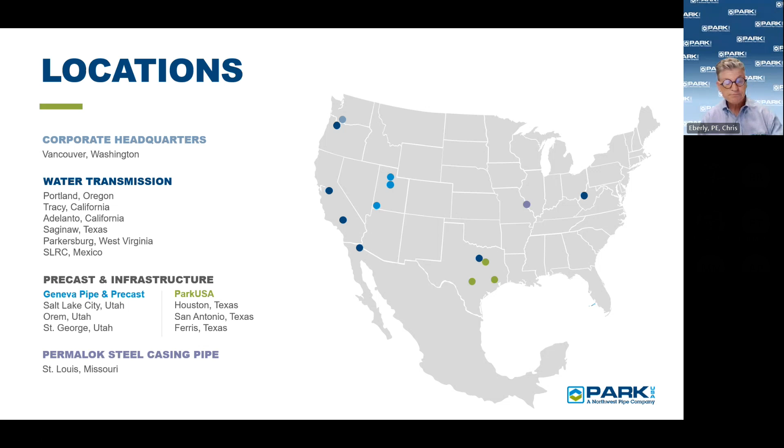We'll dive into the specifics and key components of the lift stations, including the different types of pumps, valves, and control systems. We'll go over a sanitary design for a housing community, but we'll also touch on a detention pond pump design as well. We'll present the overview in a case study format showcasing both wastewater and stormwater.

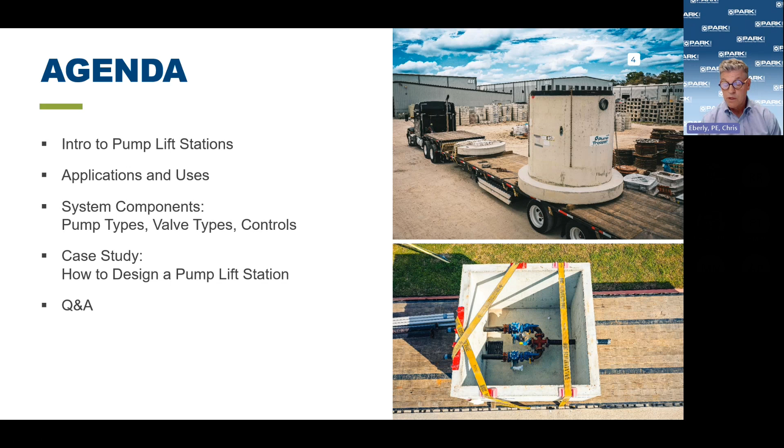Finally, we'll open the floor to your questions, providing an opportunity to address specific concerns or curiosities you may have. We're confident that by the end of this presentation, you'll have a general understanding of a pump lift station and the fundamental concepts and practical designs. So let's get started, and we are going to watch a Pump Trooper video.

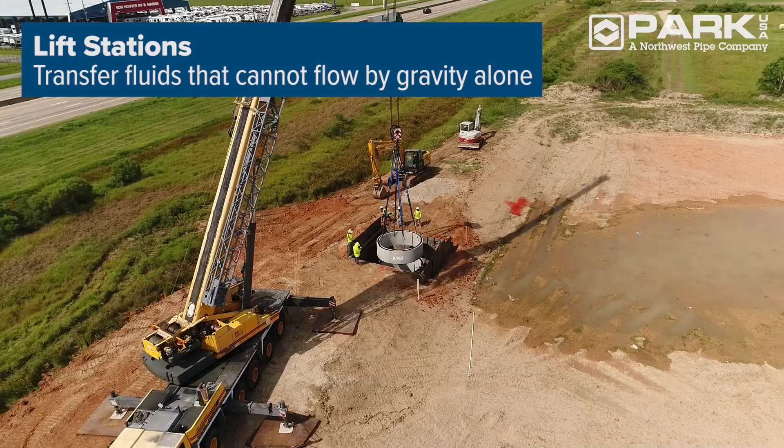Water always finds its way to the lowest point in an area. This pull of gravity can easily lead to flooding, which can create health and safety hazards as well as property damage. Lift stations make it possible for commercial, residential, and community developments to defy gravity, collecting stormwater and wastewater in low-lying areas and conveying it to the municipal collection system at higher elevations. The Pump Trooper by ParkUSA, a Northwest Pipe Company, is a submersible pump lift station that offers a reliable and cost-effective solution for fluid conveyance and flooding control.

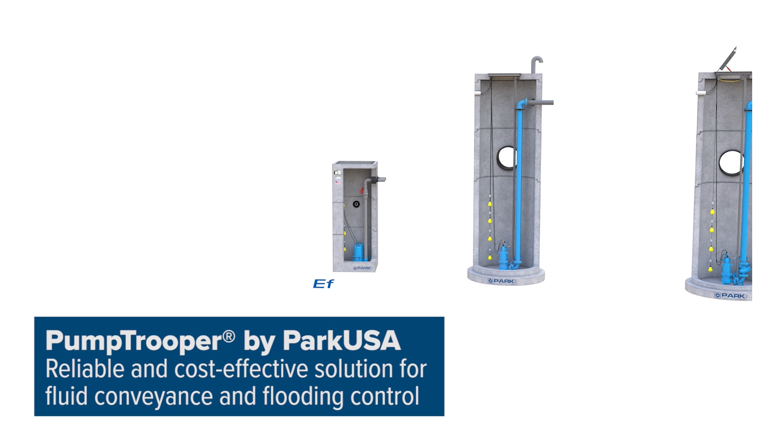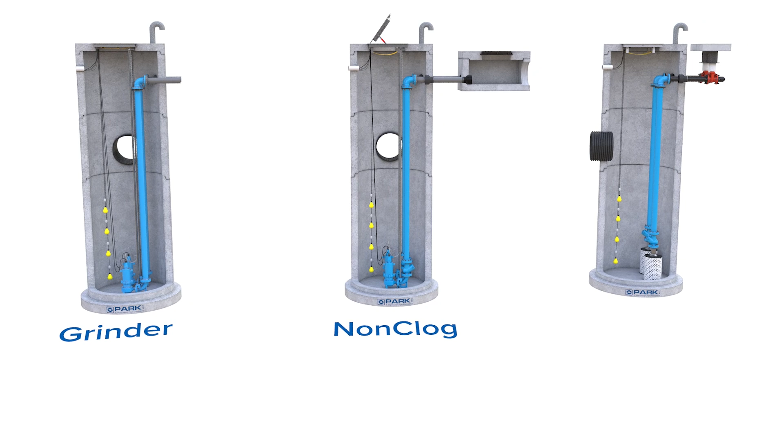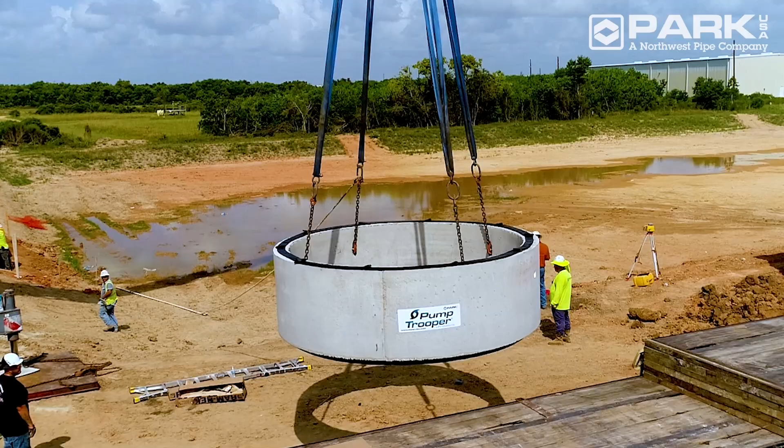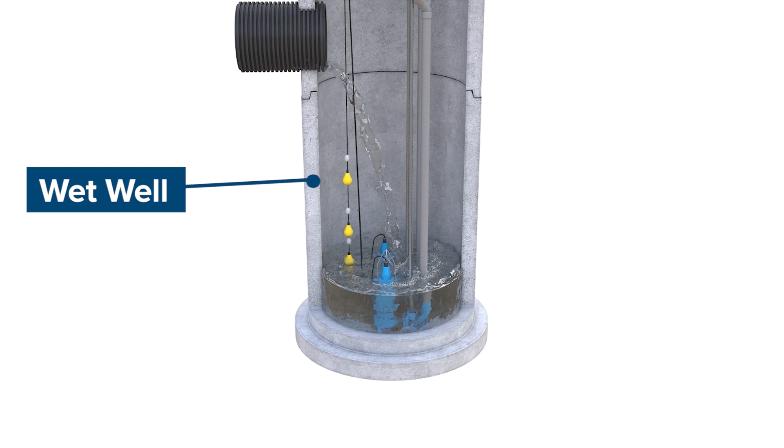With a variety of custom configurations available, we design our lift stations to the exact specifications and capacity requirements of your project. The most commonly used design is the duplex system, consisting of 2 pumps alternating in operation. Multiple pump installations like this provide continued service in the case of pump failure or maintenance and extra capacity in times of extraordinary loading. The Pump Trooper lift station works by collecting sanitary wastewater or stormwater into a wet well through an inlet pipe. As the well fills, an electric liquid level control system monitors the water level. When the water reaches a predetermined level, the pump engages, transferring the water up and out of the wet well basin into the sanitary or stormwater system.

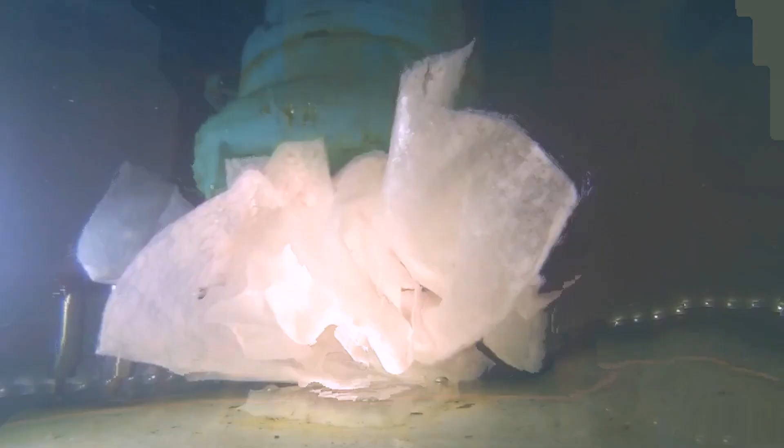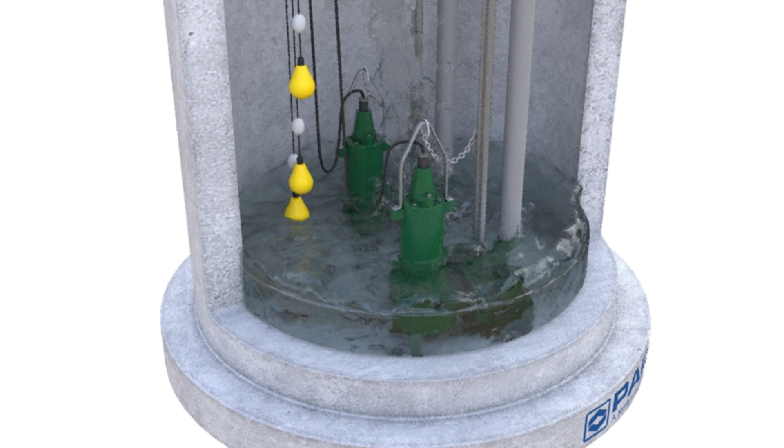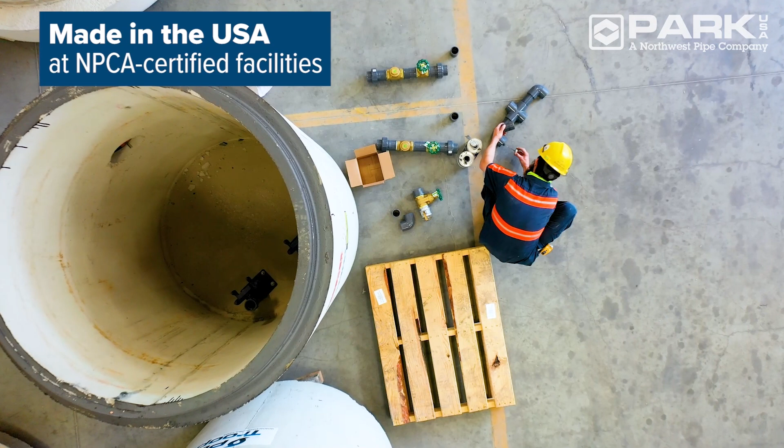For high pressure or higher head applications, a grinder pump is recommended. The powerful grinder pump features sharp cutters that shred solids and move them under high pressure through smaller diameter pipe. The Pump Trooper is powered by a close-coupled electric motor, which operates quietly and is cooled by the moving liquid for a maximized service life. Made in the USA, our lift stations are pre-assembled in a controlled manufacturing environment, ensuring the highest quality product is delivered to your job site, ready for connection. Our team works directly with the field contractor to ensure proper placement and installation.

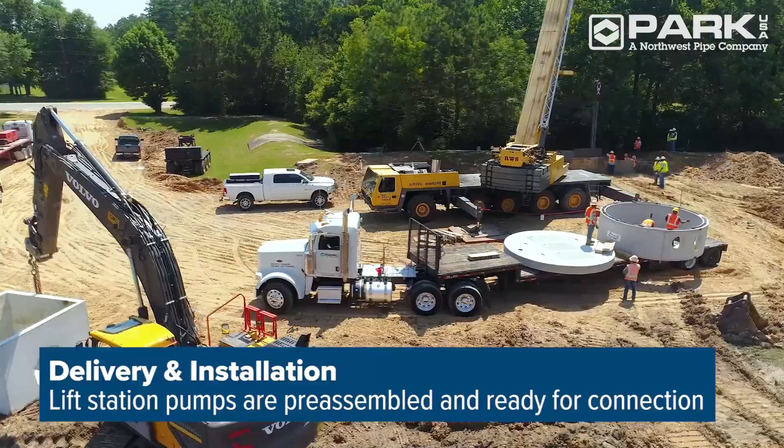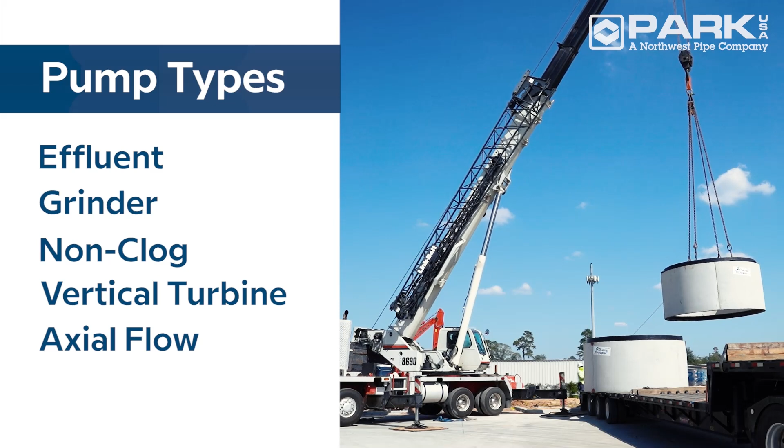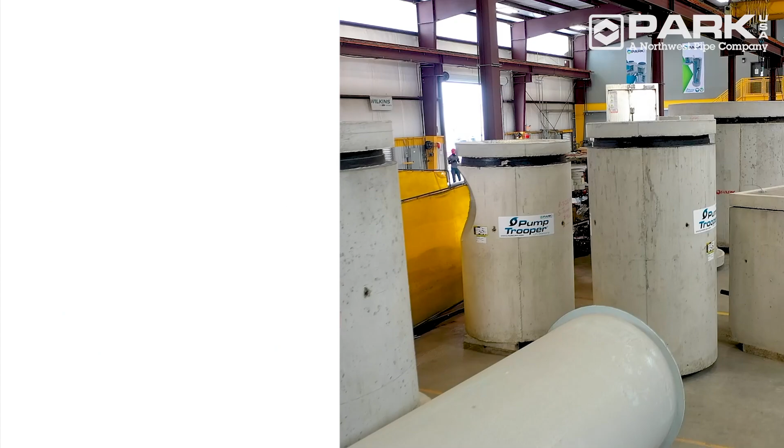Designed for the unique demands of commercial, industrial, medical, and residential environments, the Pump Trooper meets all building codes and comes with a variety of application-specific pump styles. The valve assembly can be housed in the wet well basin for smaller stations or in a pre-assembled valve vault for larger stations. Pump Troopers are available in precast concrete or fiberglass construction in a variety of sizes and with a selection of interior liners and an optional remote maintenance alarm.

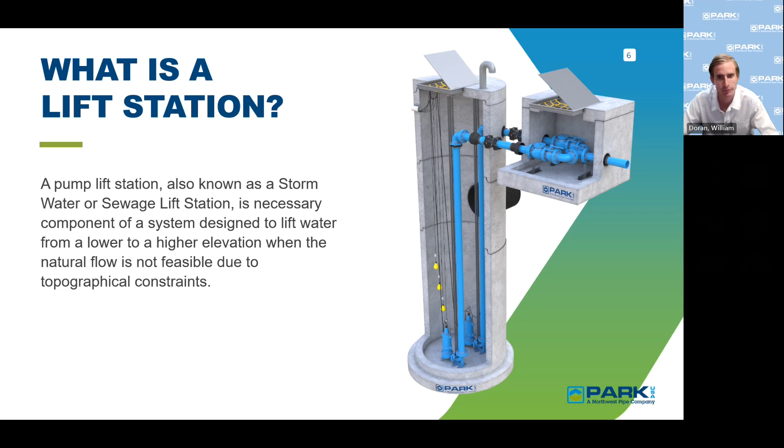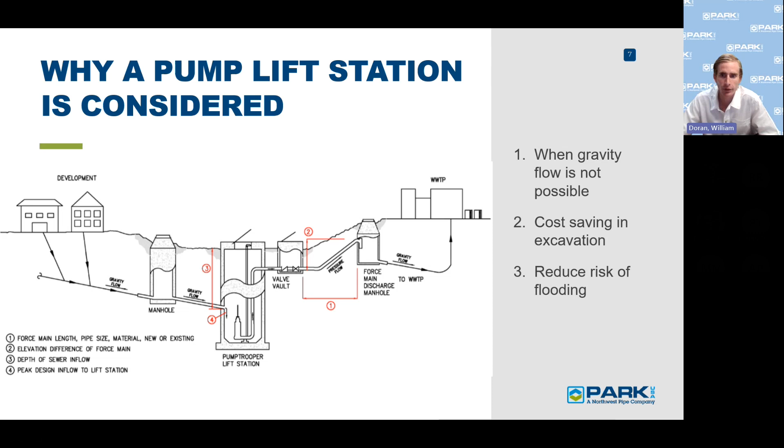So lift stations are common in 2 main infrastructure areas, which would be stormwater and wastewater. In stormwater, lift stations can be used to prevent flooding in low-lying areas by pumping stormwater to higher elevations. In urban drainage, they can manage stormwater in cities to prevent waterlogging of streets. And a popular application for stormwater lift stations is in detention and retention ponds, where water moves from these ponds to manage stormwater runoff.

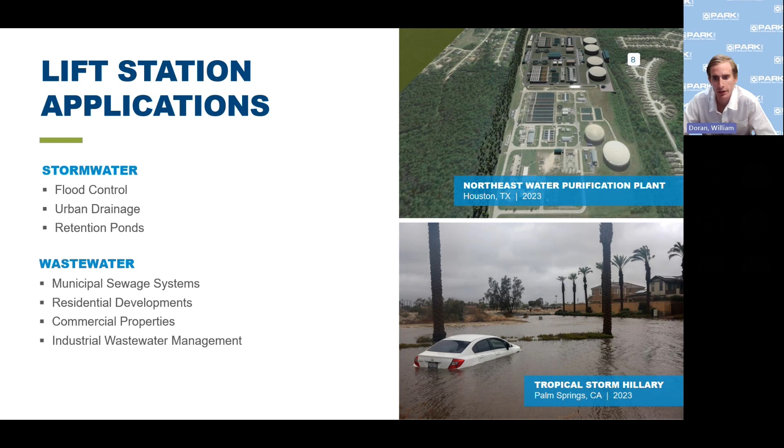In the wastewater industry, lift stations can be used in municipal sewer systems, where they will transfer waste from manholes to treatment facilities. In residential developments, they can handle sewage from homes and transfer them when gravity is not available. And in commercial and industrial properties, lift stations can ensure sanitary conditions and compliance with health regulations.

So how does a lift station exactly work? Influent water will flow by gravity pipes into a wet well, which will collect either stormwater or wastewater. When the water hits a predetermined level inside the wet well, a float, typically called a lead-on float, will activate the pump and lift the water from the wet well and travel upwards to a higher elevation.

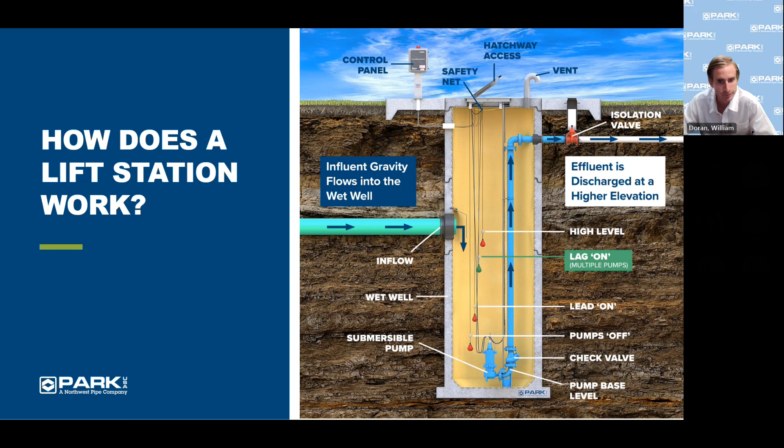Pump lift stations can get pretty complicated, starting with design and all of the various components required. For specifiers, the Pump Trooper lift station can be custom designed to fit your needs and comply with your local codes. We can assist with your design, including getting CAD and Revit drawings and pump specifications. For contractors, we can make this process super easy and provide a single-sourced, pre-packaged lift station with all of the necessary components, piping, pumps, and materials required.

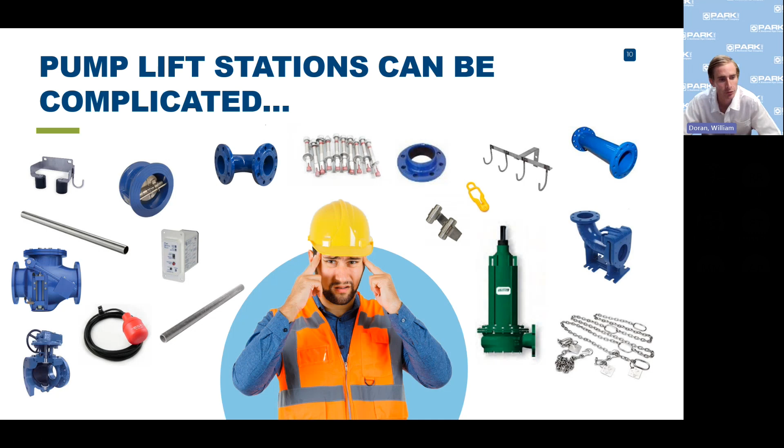The Pump Trooper pump lift stations can significantly enhance your project by offering systems that streamline design and installation. We have many prepackaged configurations available, which would include both precast concrete and fiberglass options, complete with pumps and controls, systems, piping, valves, fittings, and any accessories.

At ParkUSA, we can manufacture precast concrete structures in between 3-foot and 12-foot inside diameters. We can also include HDPE liners based on project applications. These would typically be used in sanitary and corrosive industrial applications.

We can also use various major brands of pumps in our pump lift stations, depending on your specifications or city requirements. Pictured here, you'll see a few of the various pumps that are utilized inside typical lift stations, depending on each application. In the following slides, we'll dive into each pump type a little bit more in detail.

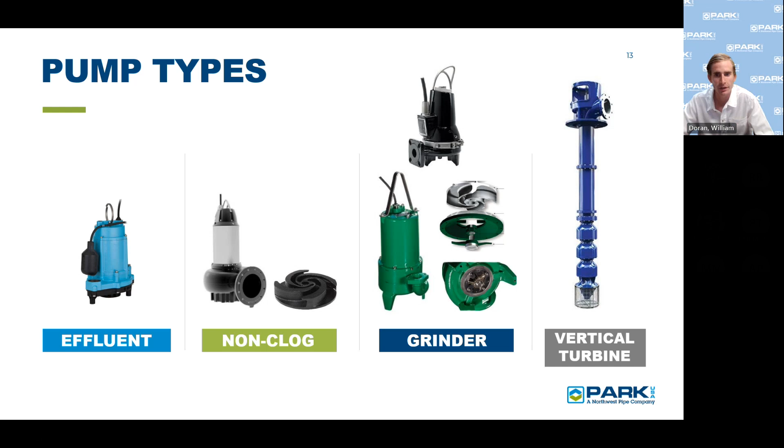So submersible pumps are pretty popular in lift stations for multiple reasons. They have efficient designs; they operate directly inside of the fluid, eliminating the need for priming and reducing friction losses. They're space saving, residing inside of the wet well compared to external pumps. They are reliable, where you don't have any outside factors on them since they're contained inside of your wet well. They can also be used for stormwater or wastewater applications, so they provide some versatility, and they're cost effective.

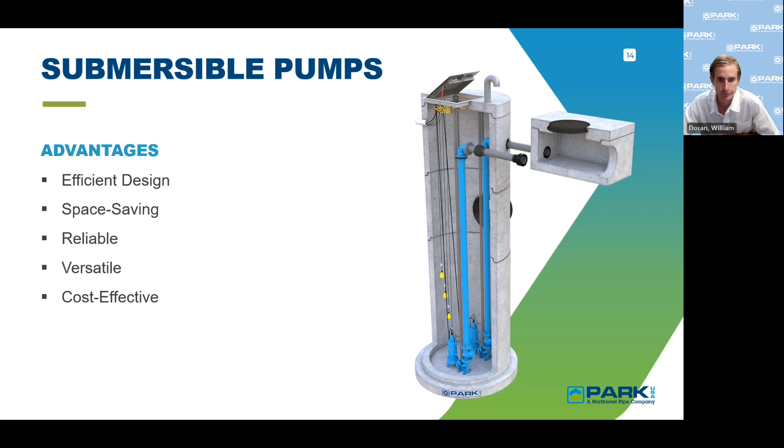Here you'll see a few graphics of some various lift station packages that we can include with or without valve vaults, depending on applications here.

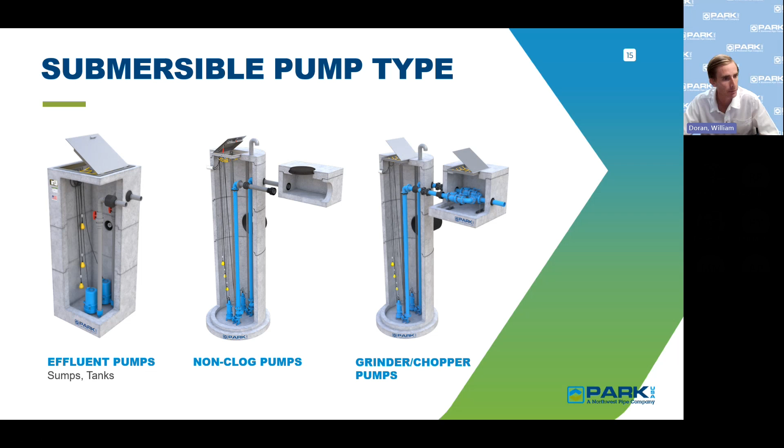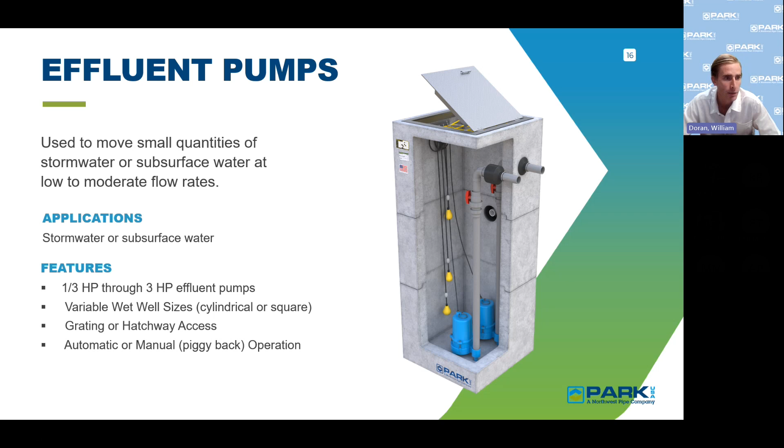So the effluent pump systems are typically used for smaller flows to moderate flows. They're designed for clear effluent and pumping treated wastewater from septic tanks or small treatment facilities. They're typically used with a piggyback float attached to the pump, or they can also have automatic float systems. We can design these types of packages in cylindrical or square wet wells, and they can include a grate top or a hatchway for access to the pumps.

Non-clog pumps are very popular in lift stations. Submersible non-clogs are ideal for handling raw sewage and stormwater. They feature a non-clog impeller. Most of them will have a recessed impeller, which allows the ability to handle high solids contents. Typically, these pumps will allow for solids to pass up to the size of the discharge on the pump.

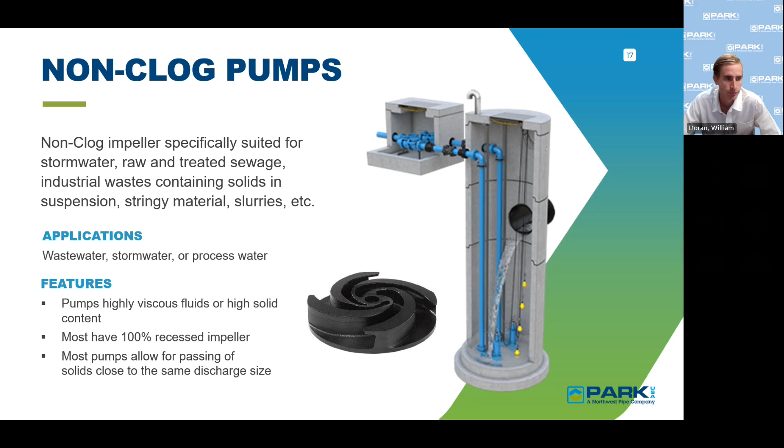Chopper pumps would also be used in a wastewater application or industrial use. They're useful when your waste has a lot of high solids content that would need to be sliced up into smaller pieces before going into the wastewater systems. They're chopped up using a cutter blade on the impellers and a cutter bar across the intake.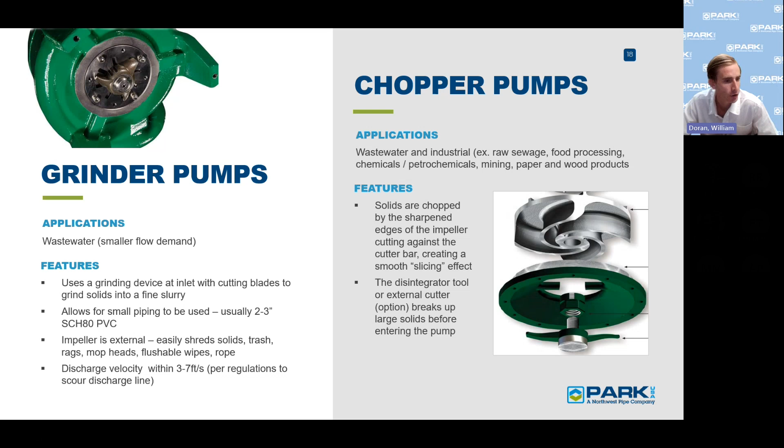So I want to talk a little bit about macerators. A very common problem for sewers occurs at detention facilities where vandalism is pretty frequent. Inmates will stuff bed sheets, towels, pretty much anything that you can think of down toilets and drains to intentionally flood the facilities. If these items make their way into the sewer system, this grinder will take a hold of the material and shred it into smaller pieces, allowing it to continue on its way. These systems will generally run 24/7, so they're always running, preventing clogs from happening.

Our pre-engineered packages would include the vault in either a channel or direct inline system, the grinder in a single or dual configuration, an access hatch, controls, valves, and piping. We would typically recommend a brand like Vogelsang or Muffin Monster, but we can use any brand that is specified.

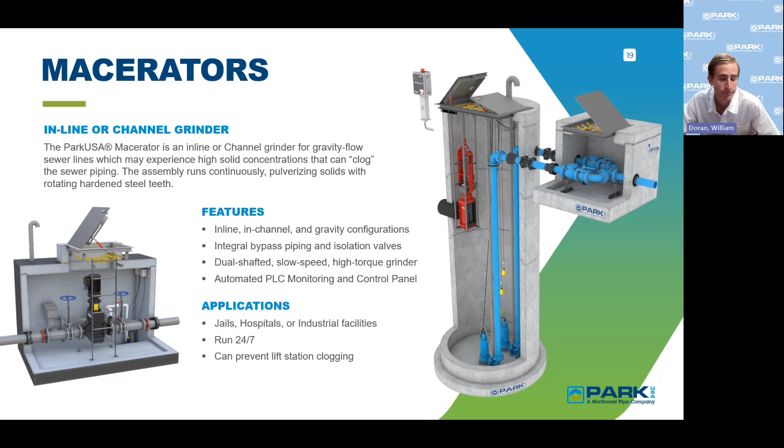Vertical turbine pumps are often used in stormwater applications. Typically, whenever you require a lot of high head or high flow, submersible pumps can get expensive, and this is another option. Typically, our package systems would include an additional jockey pump that is smaller to handle the lower flows or lower rains. These types of systems are easy because the motors sit above grade for easy access and maintenance.

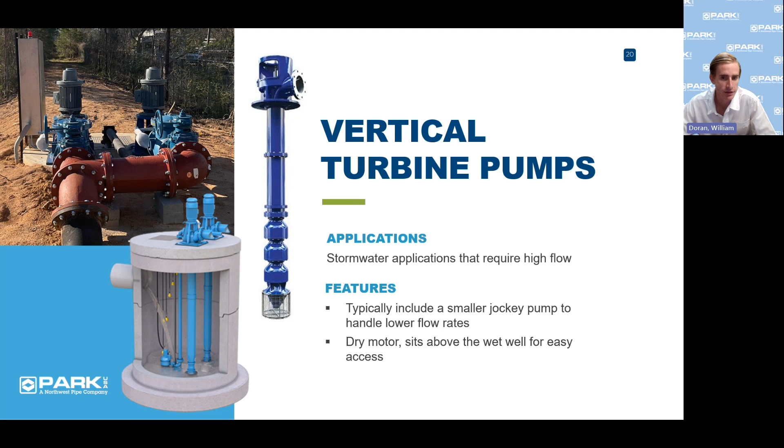Next, we'll go over a couple of the different valves used in lift station systems. You have your check valves, which would prevent flow from coming back into the wet well. These can either be ball checks or swing check valves. You also have isolation valves. These are needed for maintenance, flow control, efficiency, and they protect the equipment. These can be either gate valves, which are used for on and off control, typically with minimal restrictions. Plug valves are a little bit more geared towards throttling the pumps and offer an easy use.

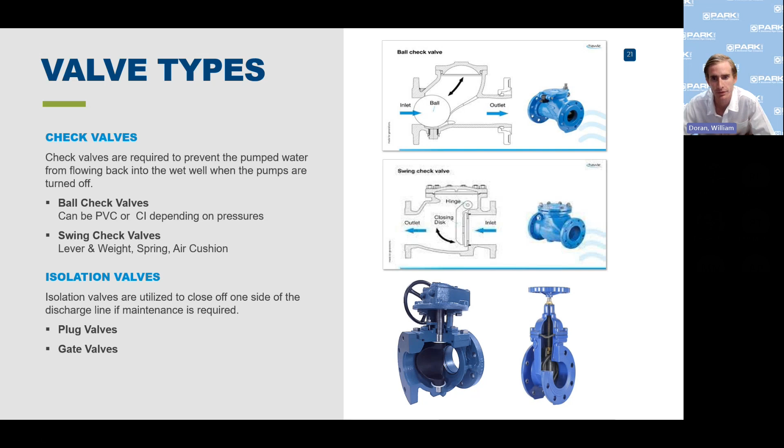So our pump trooper systems are available with different valve assemblies. We can provide precast concrete valve vaults that are pre-assembled here at our office and hydrostatically tested. Each system's factory built and pre-assembled and delivered directly to the site.

Sanitary lift station systems often use these for easy access to your valves for maintenance or if you ever had to replace one. They also eliminate any confined space entry into the wet well system. And since the valves are separated in their own valve vault, they don't have exposure to any H2S gas or corrosives that could be in the wet well.

In this larger picture, you can also see we would typically provide a cam lock fitting on many of our valve vaults. These are used for easy bypass if for whatever reason your pumps went down or you had to pull your pumps. You can easily hook up and pump your lift station out directly into the force mains.

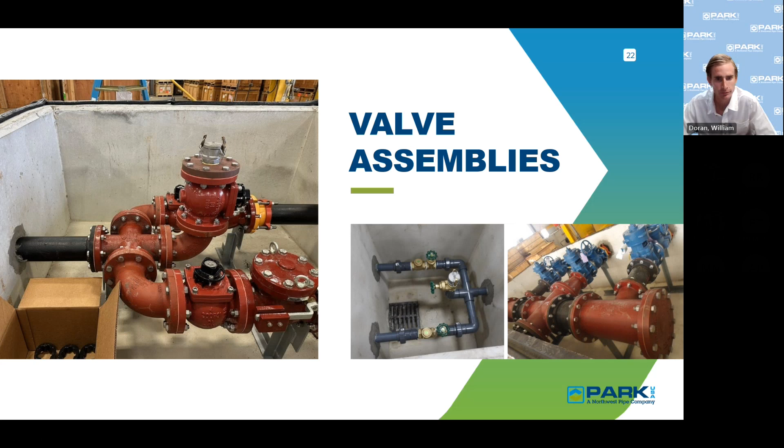You can also have above ground valve vault assemblies. These are generally going to be used, as you can see, with larger pipe sizes and valves. You can use them in both storm and sanitary applications though.

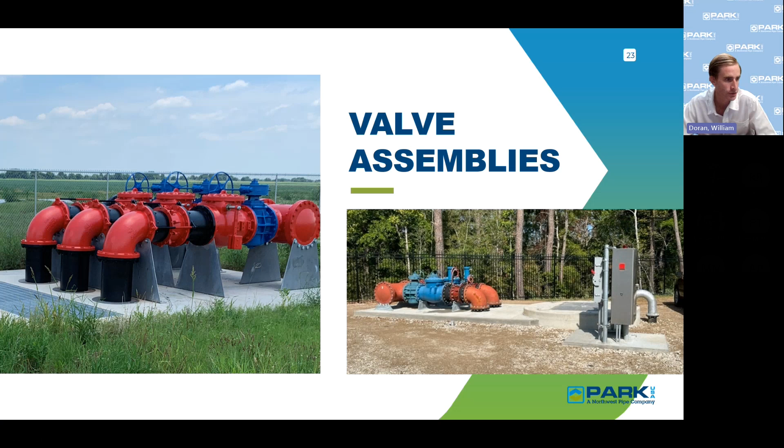The Pump Trooper control system offers advanced and reliable management for your pump lift stations. Key systems include pump automation, user-friendly interfaces, enhanced safety, and real-time monitoring, whether via IoT, an auto dialer, or SCADA options.

All of our panels typically include a generator receptacle on the side so that you can easily connect backup power. The enclosures can be either stainless steel or fiberglass, and we can include any components you need depending on your application.

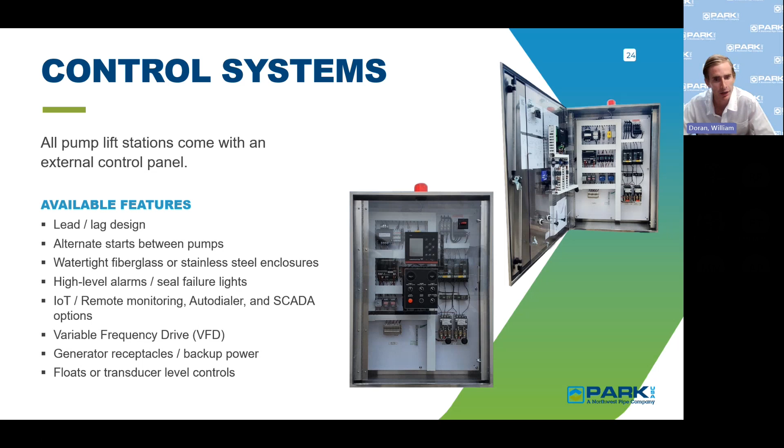Just a few pump accessories. The Pump Trooper offers a range of high quality accessories designed to enhance your pump lift station's performance and efficiency. With the Pump Trooper, you get a single source pre-packaged solution with your wet well, piping, pumps, controls, and any accessories you need for easy installation.

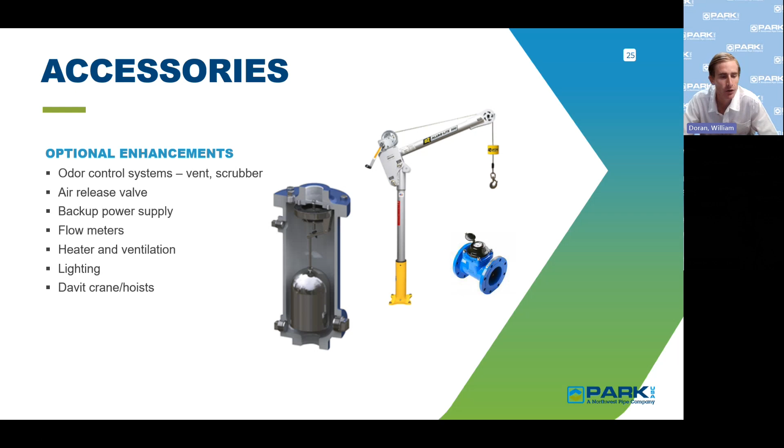Now let's talk about our case study. We'll walk through an example of how to design a pump station. In this example, this is going to be a housing community near Austin, Texas, that requires a wastewater lift station to transfer wastewater to the nearby sewer.

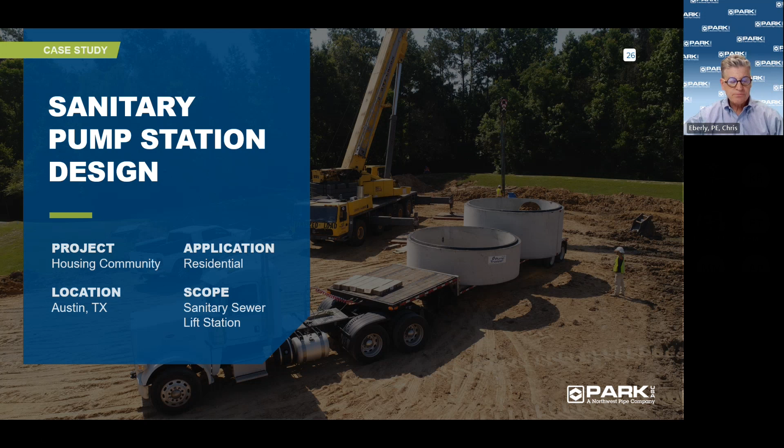Here's some project conditions worth noting. This residential community has 150 homes. The sanitary sewer needs to be extended about a quarter mile to a manhole, where it will then gravity flow into the public sewer to the wastewater treatment plant. The inlet piping for this lift station is about 10 feet deep.

One important condition is that there's only single phase voltage available at this site, in which, for the most part, anything over 3 horsepower is going to require 3-phase voltage. So we'll get into that here in just a minute.

The engineer also wanted to ensure longevity of this wet well, so we included in this unit a high-density polyethylene liner that will provide that.

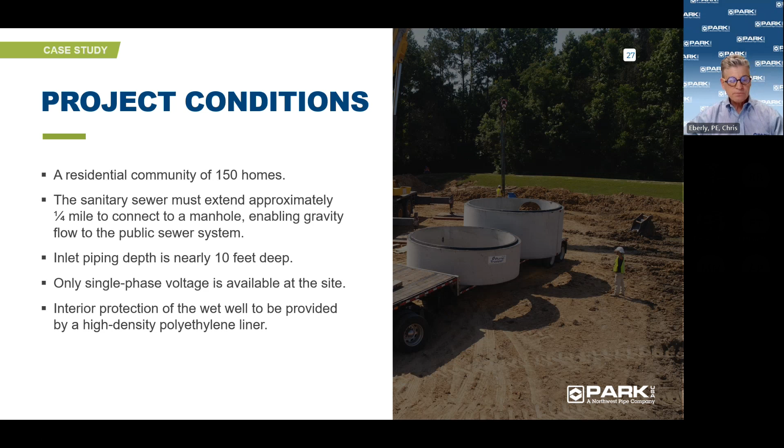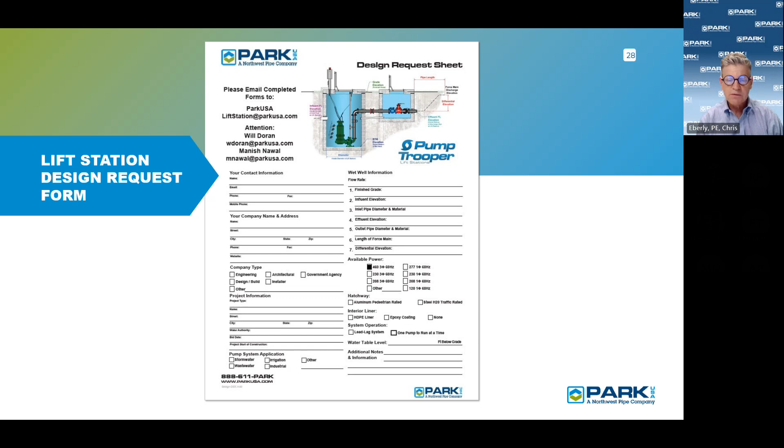So here's a few steps we recommend following for lift station design: site selection, which is really dictated by the project site and a lot of different variables; estimating the flow rate; wet well design and sizing; establishing and calculating the total dynamic head; the pump selection; the controls; lift station accessories; and then plan drawings and specifications.

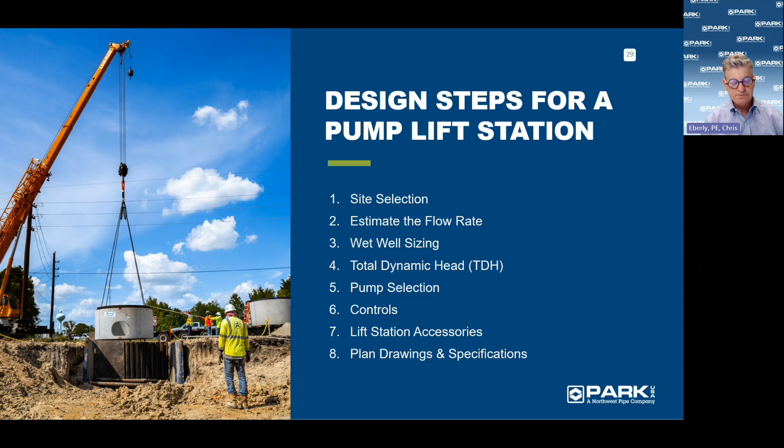So we'll go over site selection. For one thing, we need to make sure you choose a site that will accommodate the pump station relative to the local terrain, elevation factors, and things like that. Accessibility is important too, to ensure the site is accessible by vehicles and personnel.

You may have to pull up a service truck with a crane mounted to pull the pumps at times, so we need to make sure we have access to the site. The environmental impact needs to be minimized and comply with local regulations, and you definitely want to avoid flood-prone areas. And of course, proximity to residents - situate the system to minimize noise and odors. If that's going to be an issue, you can add odor systems as well.

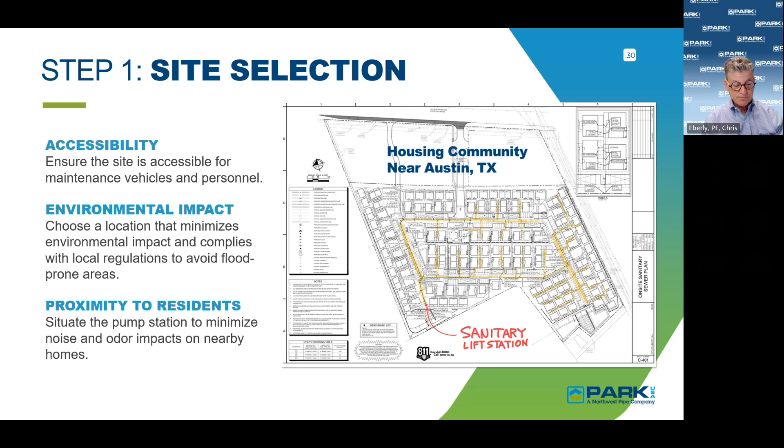The next thing we're going to do is estimate the flow rate. For this subdivision of 150 homes, each having an average of 3 persons and using an ADF, the average daily flow, of 100 gallons of water per person per day, and considering a peak factor of 3.5, the estimated peak flow rate is calculated to be about 110 gallons per minute.

Let me point out a couple of those acronyms. The ADF is the average daily flow rate per person, which typically ranges between 70 and 100 gallons per day. The PFF, the peak flow factor, is a multiplier applied to the average daily flow to account for peak usage periods. Typical ranges are 2.0 to 4.0 for residential.

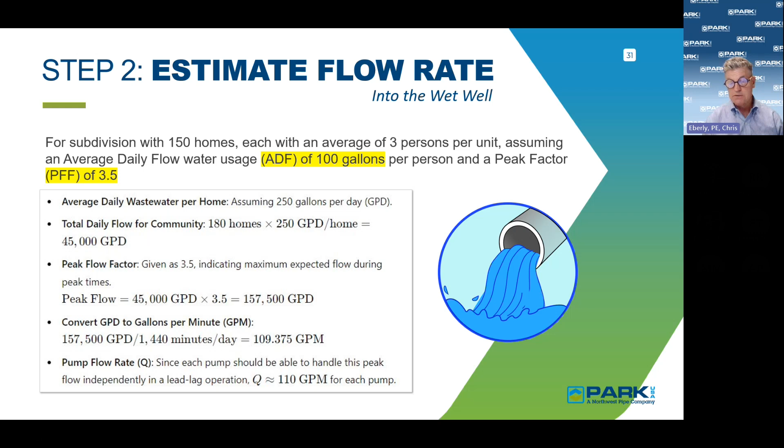In this case, we're using 3.5. For commercial applications, that's going to be 1.5 to 2.5. Now, these values are often specified by the local municipality or state government, so be sure to research this information for your project. This estimation of the flow rate is going to help us in designing the lift station as we go through this.

Next, we're going to talk about the wet well sizing. Again, this subdivision is 150 homes, and the wet well is designed to be able to handle 110 gallons per minute.

This will ensure that the pump does not exceed the maximum cycle rate of 6 starts per hour. If you exceed the manufacturer's recommendations for starts per hour, you could prematurely reduce the life of the pump. So in this case, the pumps we're considering use 6 starts per hour.

We determined the wet well diameter to be 5 feet. We anticipated this diameter based on the size of the pumps we're going to be using, and to provide plenty of room for the pumps, the floats, and the piping.

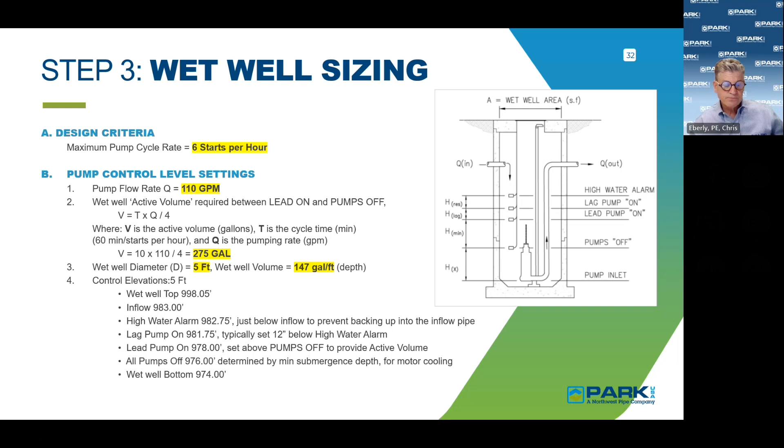Next, we're going to talk about the total dynamic head. The total dynamic head is the sum of the static lift and the sum of our friction losses, which are due to pipe and fitting losses. We've estimated this to be about 37 feet of head.

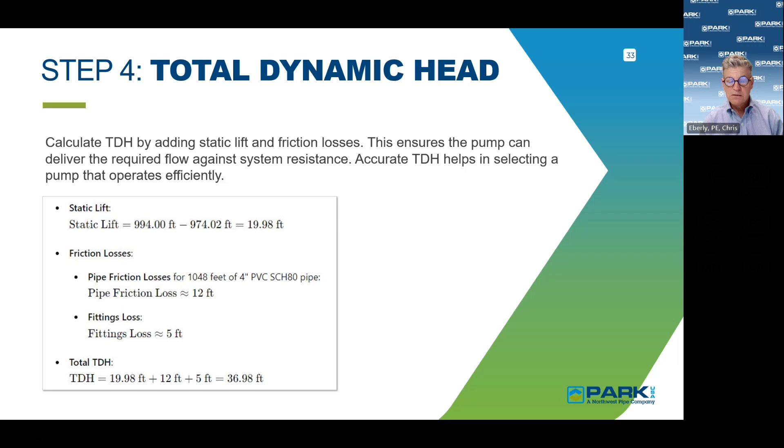We'll use this in our next step, pump selection. For pump selection, I put a few important factors there. For one, it needs to handle the conditions we calculated. At 110 gallons per minute at 37 feet of head, the pump needs to be able to perform.

For redundancy, this is going to be a duplex system, which offers 100% redundancy if one pump were to fail. Each pump is going to be sized at 110 gallons per minute at 37 feet of head.

The other thing this duplex will do is, if the flow rate ever exceeds those conditions of 110 gallons per minute, the next pump will step in to assist the primary pump in a lead-lag operation. The lead pump powers up and starts to pump, and if the level in the wet well continues to rise, the lag pump will kick on.

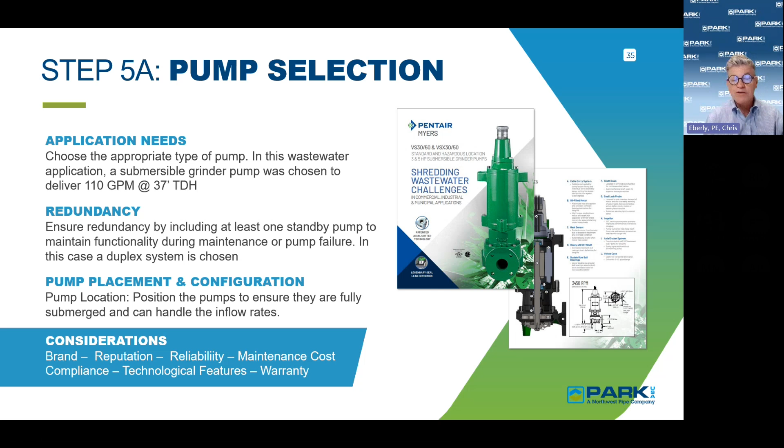There are other considerations too: brand reputation, reliability, maintenance cost, compliance issues, technological features, and warranty. These are all factors you want to ensure the brand of pump you spec meets your job site conditions.

Next, we're going to plug in our parameters within a program that will help select the exact pump to fit our conditions. Every reputable pump manufacturer will have some type of computerized selection guide to help us do this, and the end result will be a printout of the actual pump and its performance parameters.

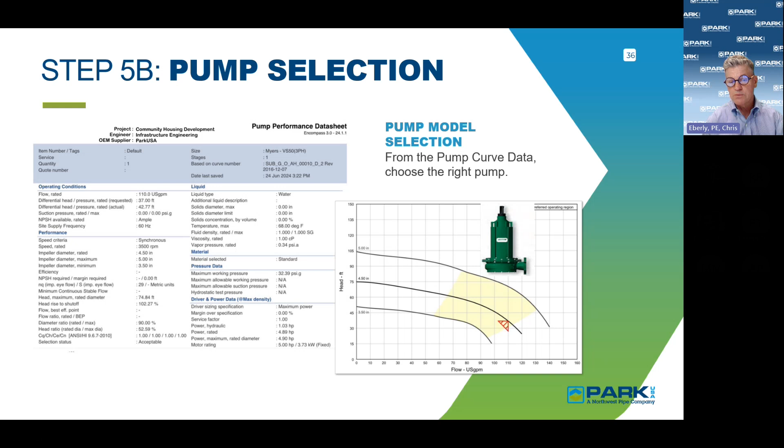As you can see here to the left, it's a data sheet that prints out all of our factors and results. On the right-hand side, you can see the resulting pump curves, and you can see where our mark is sitting on the curve in a nice area. So we're going to select this particular pump going forward.

Next, we get into the control system. One factor on a duplex system is pump alternation. As I mentioned before, these pumps will alternate lead to lag, and every time the cycle starts, a different pump will start up. This helps even the wear of the pumps, so each pump has the same amount of hours on it.

We determine where the level control floats are going to be. The bottom float is our low-level pumps-off float. Rising up from the bottom of the wet well, the next float switch is the lead pump on, then the lag pump on, and the final float is the high-level alarm, situated near the inflow pipe of the lift station.

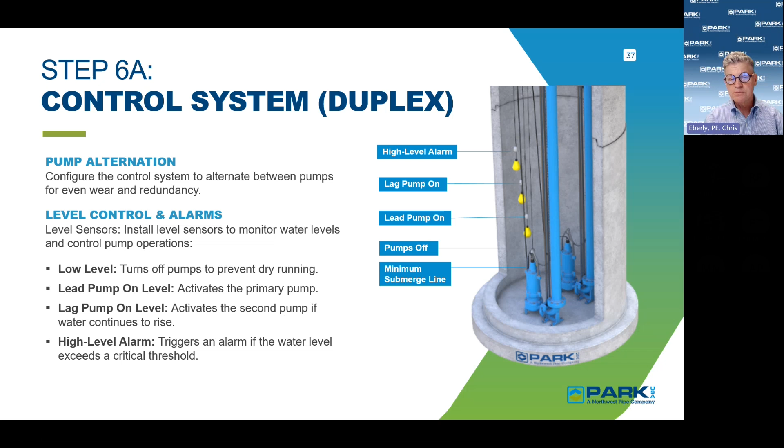Then we get further on the control system. Let me just go over a few unique things for this particular system. Again, this is a duplex lead-lag operation. It's in a weatherproof stainless steel panel. And remember what I said earlier about the voltage that was available at the job site, single phase.

Well, it turned out that the pump that we've chosen is a 5 horsepower pump, which requires 3-phase power. So what we did was we included a VFD system, and that stands for variable frequency drive. And we're using that for phase conversion. So we're able to take single phase voltage, in this case 240 volt single phase, and convert that to 240 volt 3-phase.

And there's other areas where VFDs can help a system, and that's to enhance the energy efficiency performance, and really cause us to be very energy efficient. By the way, I read the other day that this actually helps reduce our carbon footprint, right? We use less electricity. So there's environmental benefits and cost savings by using a VFD system.

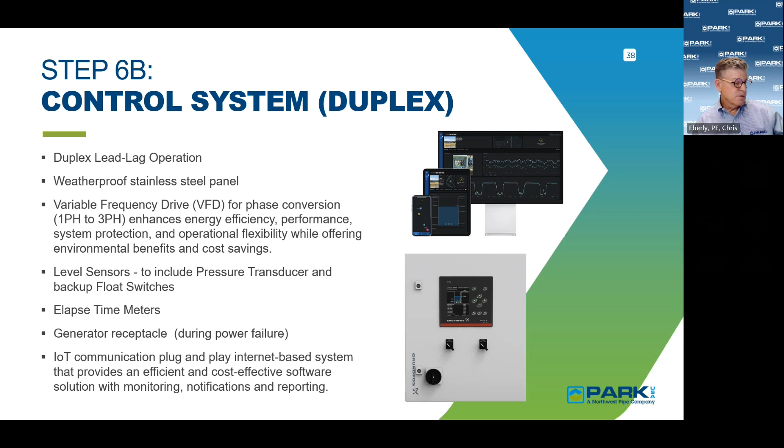Gooseneck ventilation systems to ensure proper air circulation and to avoid hazardous gas buildup. Again, pump lifting chains and handles, it's all stainless steel components. Check valves to prevent backflow and maintain proper direction. Plug valves for easy operation and maintenance. Alarm systems, as I mentioned earlier, and electrical junction boxes within the unit that are all watertight.

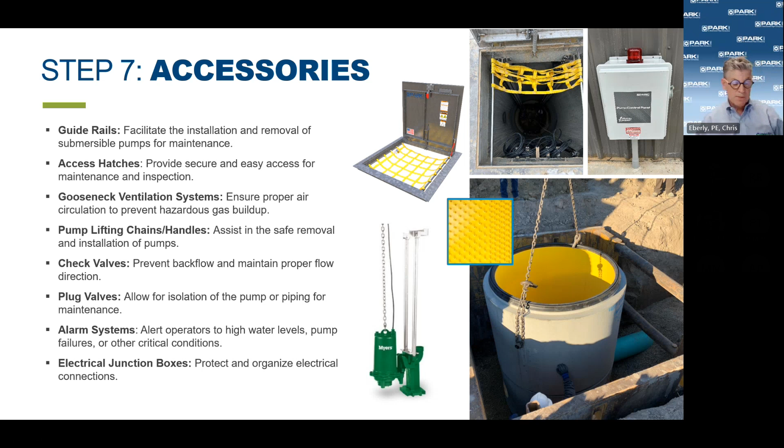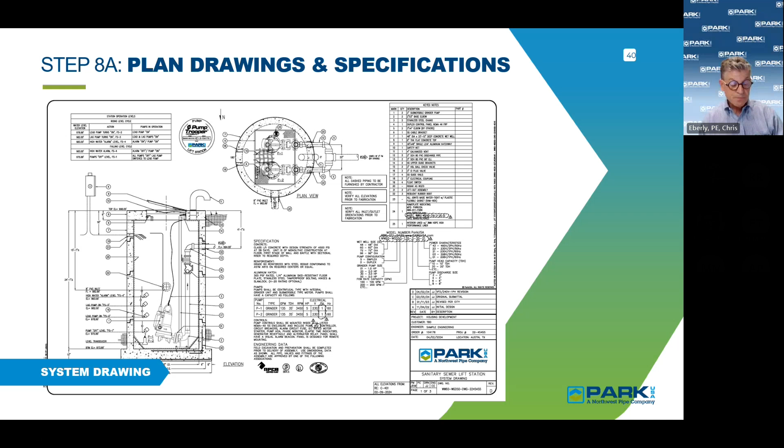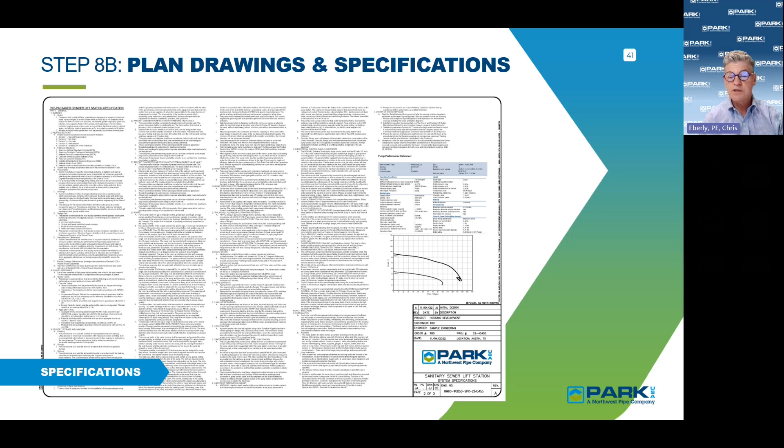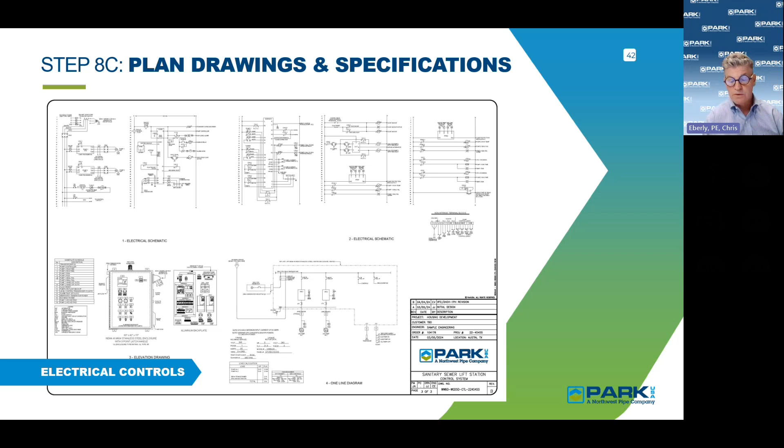So I'm gonna throw some bonus material out here. This is a stormwater lift station design. There's a lot of shared characteristics of the stormwater and the wastewater, but on the pump sizing, it is a little bit different. That's what I'll go over here.

So this is a stormwater lift station that's going to transfer water from a detention pond to a roadside ditch or a local storm sewer. This detention pond has a volume of 300,000 cubic feet, which translates into 2.2 million gallons of water. In this particular county, the stormwater regulations require the pond to drain within 24 to 48 hours.

The specifier wanted to be conservative here and do it in 24 hours. So doing the calculations, it's going to require 1,558 gallons per minute per pump, since this is set up to be a lead standby configuration, which means that each pump needs to be able to produce that in the event you have a pump failure.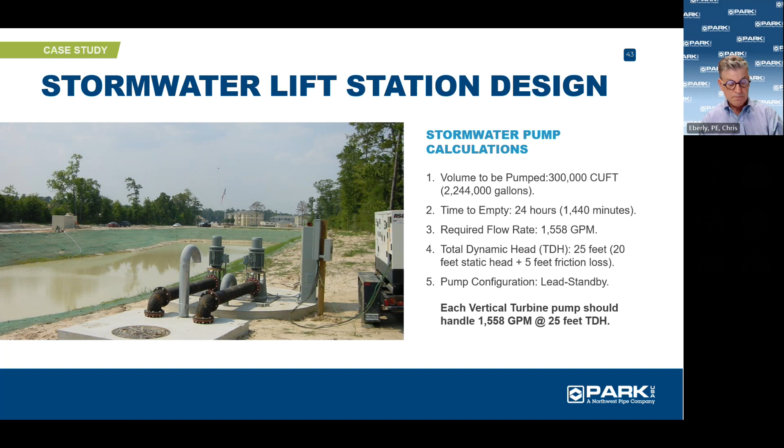So I'm going to invite Will to jump in here with me on some of these pictures. As you can see here, these are some job site photographs. And on that one picture there, is that, Will, a 10-foot, or no, it's a 12-foot diameter basin. And judging by that inlet size, this is definitely going to be a stormwater wet well. So as you can see, they're offloading the first stage of that and setting it into a shored excavation by the contractor.

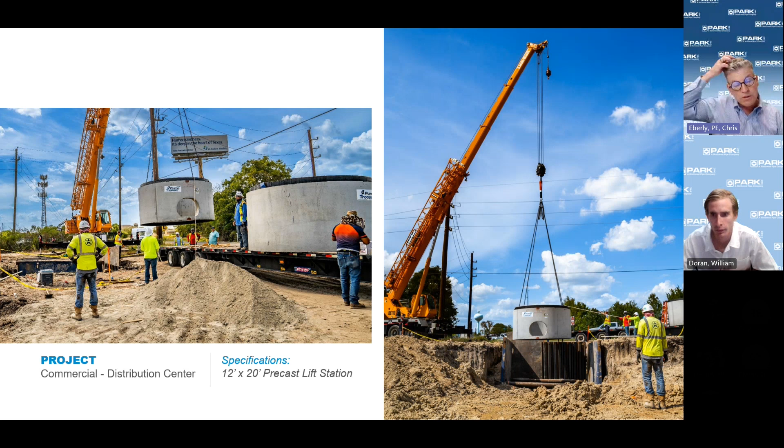And I would say part of our success in lift stations is the fact that we help with the logistics and the setting of many of these stations. So that's a tremendous advantage for the contractor. I think this one was a smaller sanitary lift station. You can see that ParkUSA has their own crane trucks, so we can help set the lift stations into your excavation for you.

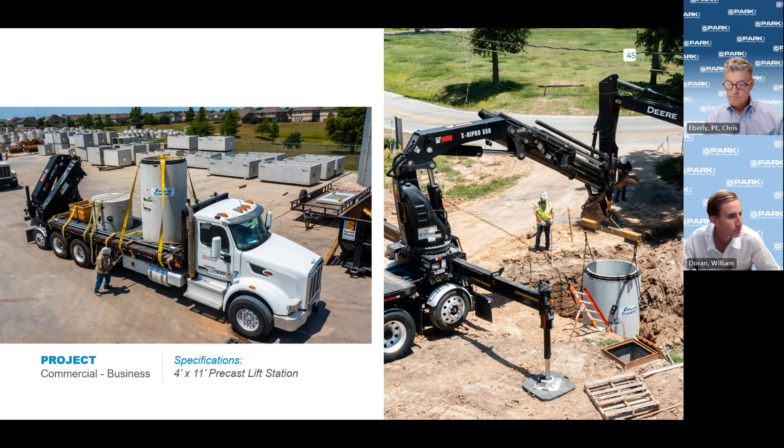So that system there is an example of when we make a system, a lot of these are going to be too big to transport all put together. So what we do at our plants is we design these, build these, and dry fit all the components in our plants. But then we have to take them apart to be able to ship them. So as you can see there, there's discharge piping with some plug valves on there. And then on the right, you can see some of the discharge vaults.

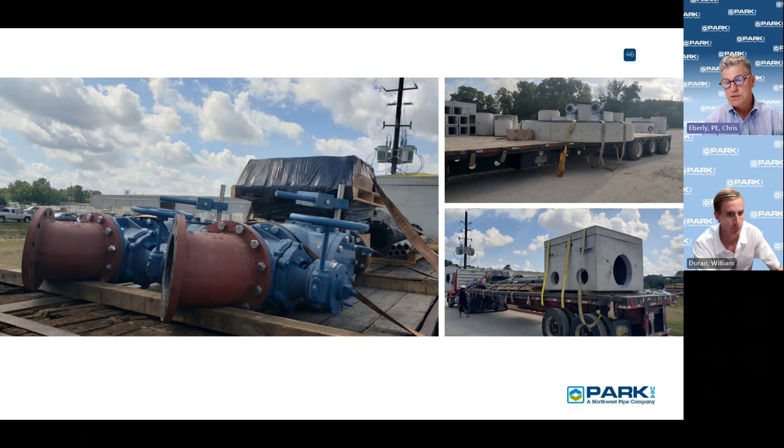And on this slide here, we're looking down one of the wet wells. This looks like a wastewater application. It's a 4-foot diameter, 12.5-foot deep unit. As you can see, we provide a safety net for all of our hatchways.

Then on the lower right, you can see that's a discharge vault there, pre-piped with Schedule 80 PVC pipe. And as Will mentioned earlier, in the center is that cam lock with a valve, which will enable, if they do have a clog downstream, or if they have issues with their pumps, them to connect on there and actually pump down and suck out the lift station.

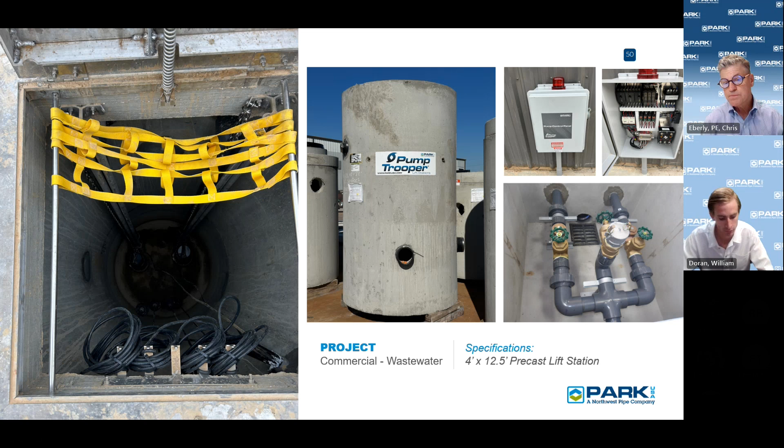And now we're going to open up for questions. So Manish, do we have any questions out there? Yeah, we have many questions. Some of them we already answered in the chat and in the presentation, but I'll read them again.

The first one is, do the pumps in a duplex system alternate between lead and lag? Yeah, sure. Your pumps would alternate starts. So every time your lift station needs to turn on, pump 1 would run. And then the next time it turns on, pump 2 would run to get even wear. Okay. We'll go to the next question.

A couple of people asked, do we provide signed and sealed design calculations for structural components for our lift station? And yes, we do provide the signed and sealed drawings and design, but we'll need the geotech report and the project conditions. Then we can design it and submit it for approval. Next question is, what material is applied to the joints of our manhole sections for the wet well?

So for stormwater, yes, we can design the pump based on the restricted flow, and you can provide that information on the design request form in the notes section for stormwater. Yeah, not only that, Chris, the design request form gives us some information, but when we're working with the specifier, this is all information that we can communicate via email and phone calls. Will, do you want to add anything else?

There's a question here about vertical turbine pumps being an option for high flow, low head, and asking if a submersible pump can do it. So vertical turbines are used for higher flows. Once you start getting into 5,000, 8,000 gallons a minute, it's generally more cost effective compared to a submersible pump.